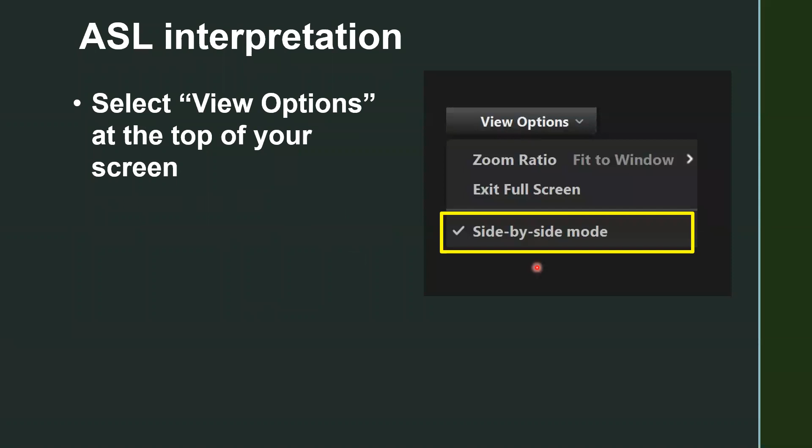I also want to talk about optimizing your screen for ASL interpretation. You can go to the top of your screen, click on View Options, and select Side-by-Side Mode. This is what that will look like on your screen. Once you click on Side-by-Side Mode, you should be able to see both Sarah and Lori, our ASL interpreters, on the right-hand side. This is just a sample image—this isn't actually Sarah and Lori.

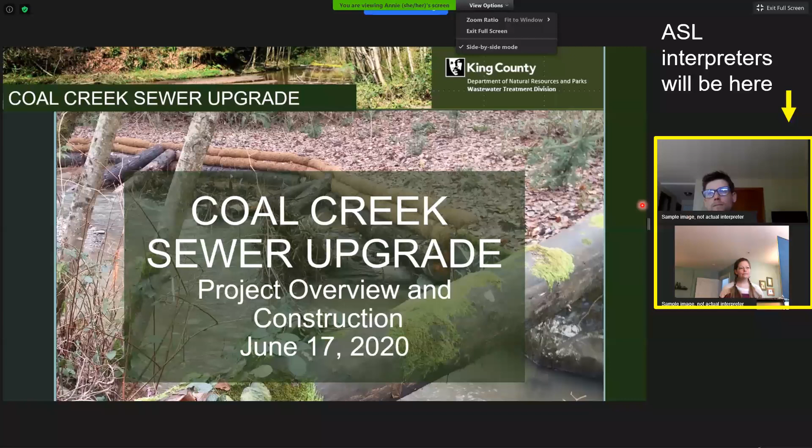If you would like to make the window bigger so you can see Sarah and Lori easier, you just click on this bar here and drag it to the left, and that will make the screen bigger so you can see the presentation and the ASL interpreters at the same time.

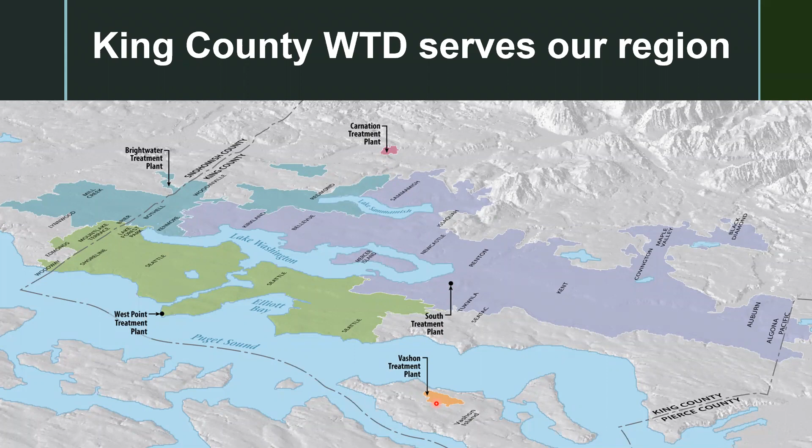We also operate two local treatment plants, at Carnation and on Vashon Island. Overall, we treat an average of 180 million gallons a day, but that number can go much higher when it rains. It can be hard to imagine big numbers like 180 million gallons - it's enough water to fill 3.6 million bathtubs every day, if you can imagine that many bathtubs.

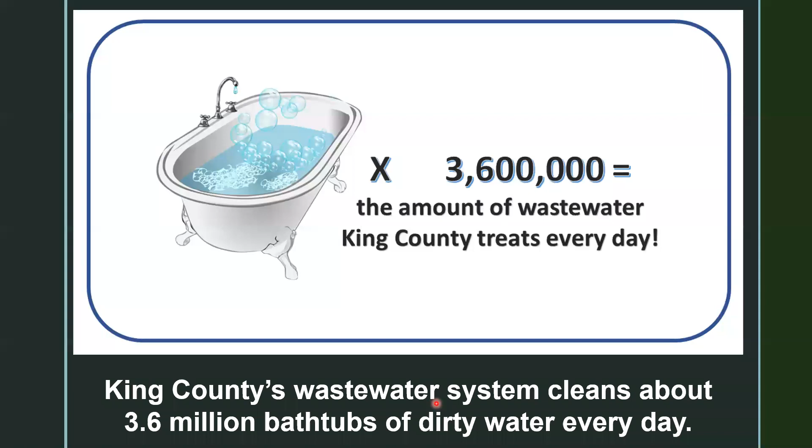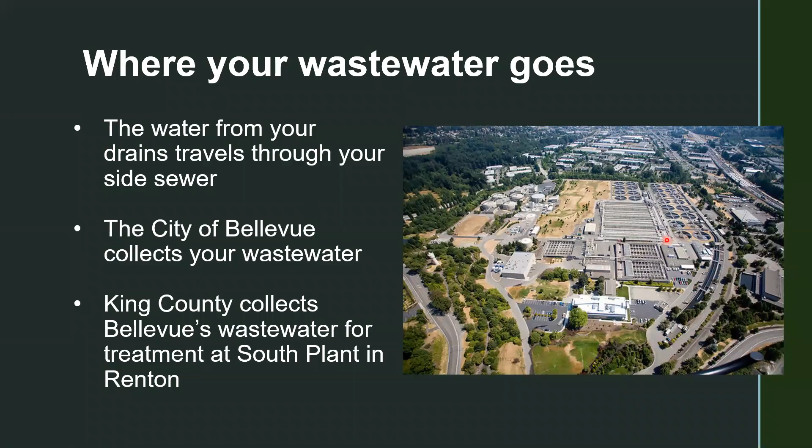Now that you know who King County WTD is, I'm going to show you why we need to build this project.

You may be wondering why there's a pipe along a creek in a park. This is in part due to the fact that this pipe was built a long time ago, before the park and trail system existed. For the designers at the time, this was a really sustainable approach, because the system was able to use gravity to collect wastewater down at the low point of the ravine, which saved on equipment, energy, and labor costs.

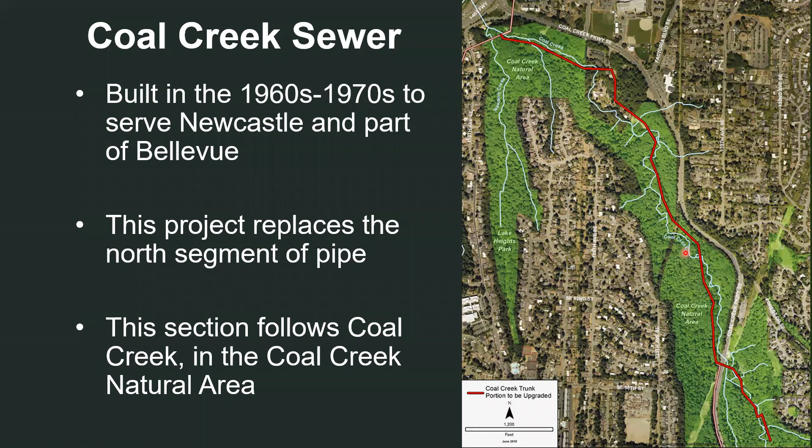So King County needs to do this project because the pipe doesn't have enough capacity to support this growth into the future. At the county, we monitor both pipe flows and population growth, and we start projects like these when we see that the pipe might not be large enough in the future to meet the needs of the community.

Right now, this part of the Coal Creek sewer doesn't have enough capacity to meet the King County pipe size standards, and there's currently a 50% probability that the pipe could overflow to the creek in any given year, which is something we really don't want to happen.

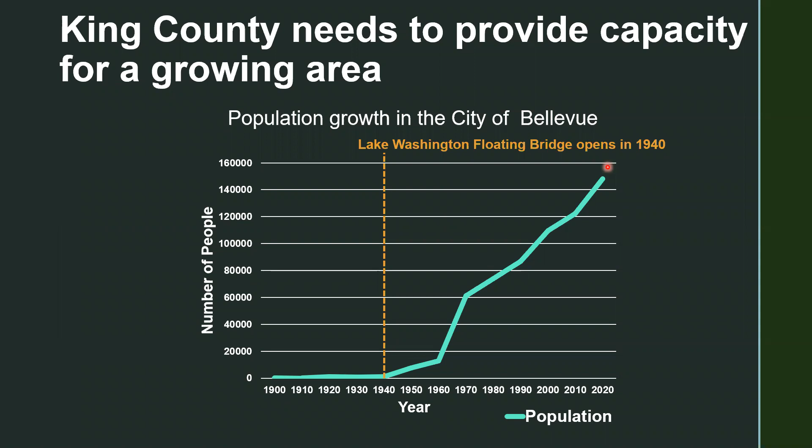If the sewers were in perfect condition, we would have the same flow in dry weather and in big storms. However, if the pipes are not maintained well, they can get cracked and groundwater can seep into them. This then fills the pipe in large storms with water that is not actually wastewater. Leaky sewers are not just taking up space in pipes, there's also additional costs to pump this clean water to a treatment plant and then treat it.

So if you are a homeowner, you can really help save capacity in our pipes and control costs by periodically inspecting and maintaining your side sewer so that we can keep groundwater out of the pipes.

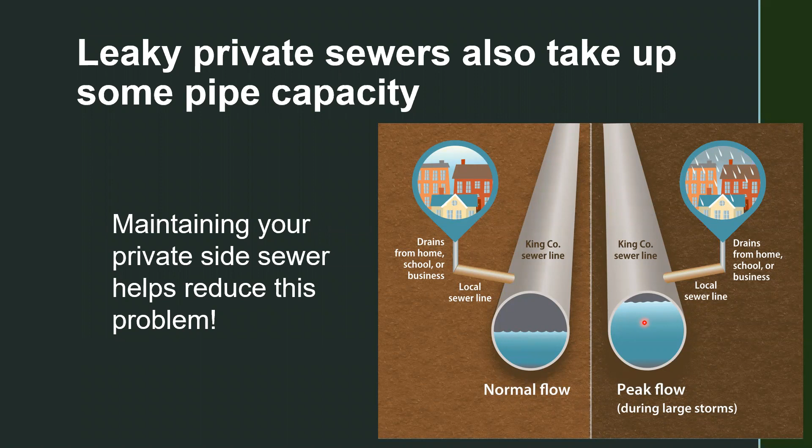Besides providing more capacity in the pipes, this project really gives us an opportunity to find a better location for the pipe and get it out of the natural area. Due to its unfortunate current location, we have had to carry out several projects to repair and stabilize the creek banks after large floods have exposed the pipe. So far, this has happened at least 4 times. In all those times, the pipe has stayed intact, but it is at risk every time the bank erodes.

Right here, you can see the pipe erosion and how steep the side bank gets. On the left, you can see where the pipe was eroded in 2015. Over in this picture, on the upper right, you can see the extensive damage that was caused after a major flood to this bridge and to the trail system. This white thing here is the pipe that has become exposed.

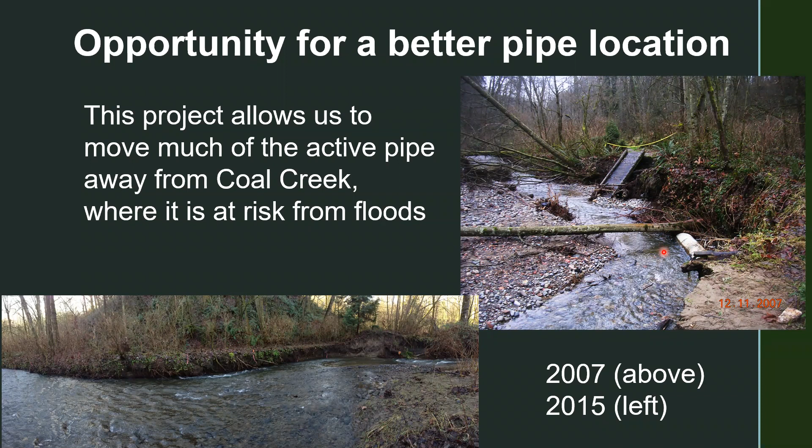Our team looked at this pipe upsizing as an opportunity to move the pipe away from the creek, protecting both the pipe and the creek. So this improved design will really help reduce long-term costs for our ratepayers.

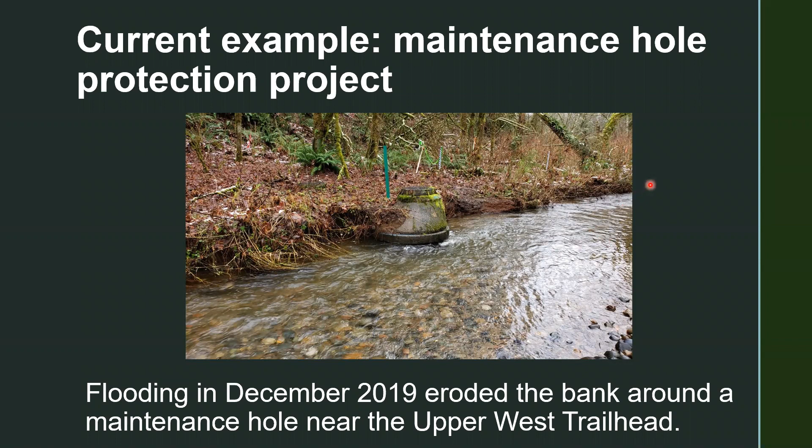We are currently dealing with an example of why we need a new pipe location right now. There was some large flooding back in December 2019 that eroded the creek bank by this maintenance hole structure. You can see how this structure is now exposed to the creek instead of being protected by the creek bank. And just for context, the pipe comes underneath the creek here and then flows up the side here. The large rains and floods in the December 2019 event also filled the sediment pond by the Upper West Trailhead, which is just downstream of here, and many of you may have used that parking lot.

So this is just another view of the maintenance hole structure from the other side of the creek, but this is during much lower flows. You can see the water is a lot shallower and narrower.

Our facilities inspection crews have been monitoring the structure since these December floods. In this picture, you can see one of our employees going to measure the ground cover above the pipe and around the maintenance hole structure. There's been enough erosion around this structure that we need to do a temporary project to protect the maintenance hole

until the larger project is finished. This summer, we will be completing a project to shore up the bank. This structure here and the pipe will eventually be removed when our new project is in place.

This smaller project is in environmental review right now, and you have a chance to comment on the work if you'd like. You can find links on our project website to find and review the environmental documents and provide comments.

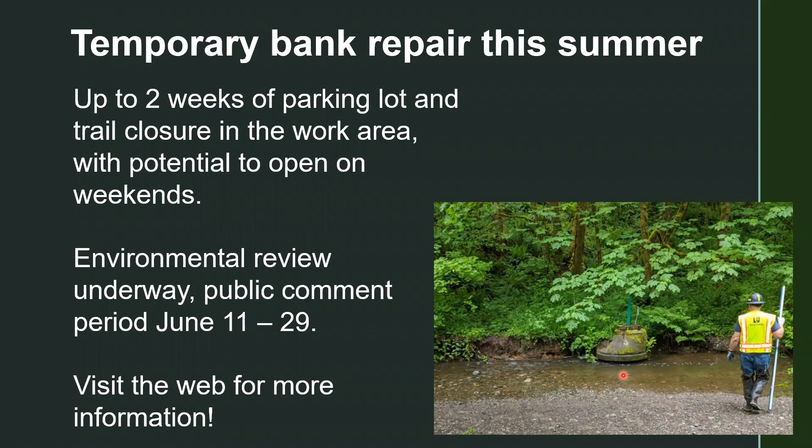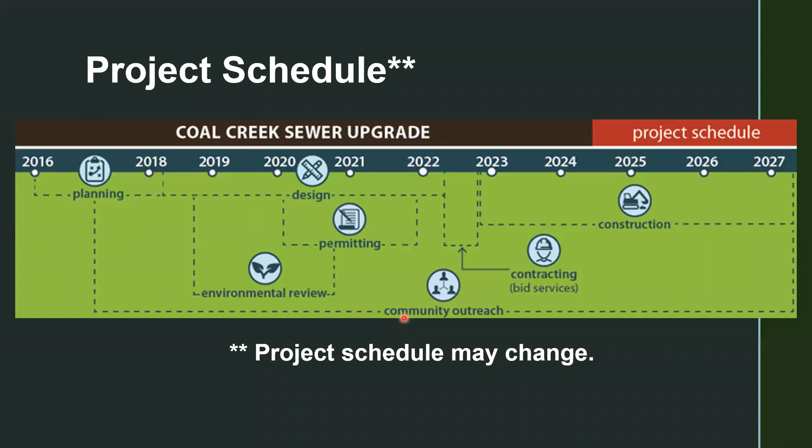Thanks, Liz. This is Ron Bard. I'm the project manager for the consultant team. I work with Brown and Caldwell, and I'm leading the design team to help design the project for King County.

The local system now connects to the existing pipe. We're moving the new pipe over quite a bit, so that requires a fair number of new connection pipes to go from one to the other.

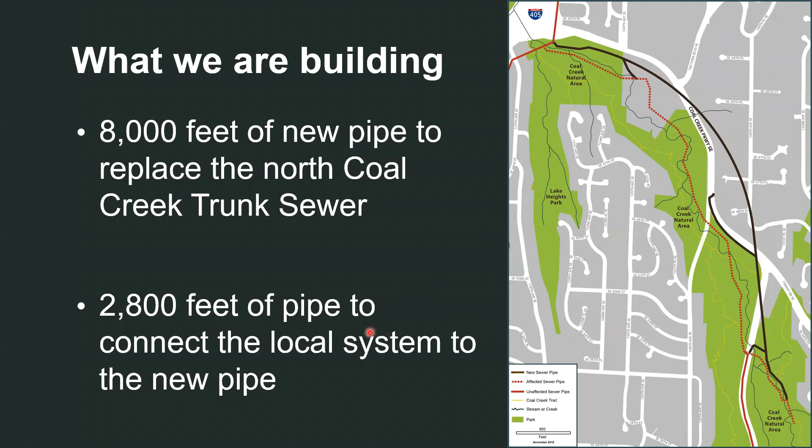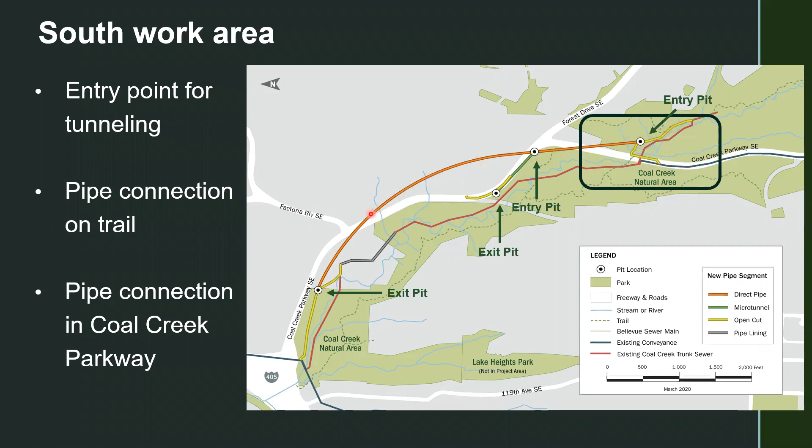This is where the entry pit is located, and where the tunneling will start, and where the tunnel boring machine will feed pipe into this new tunnel section that goes along here to the exit pit right here.

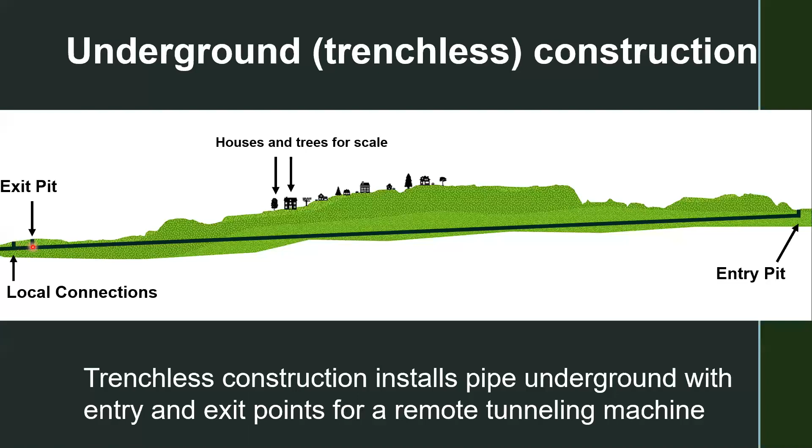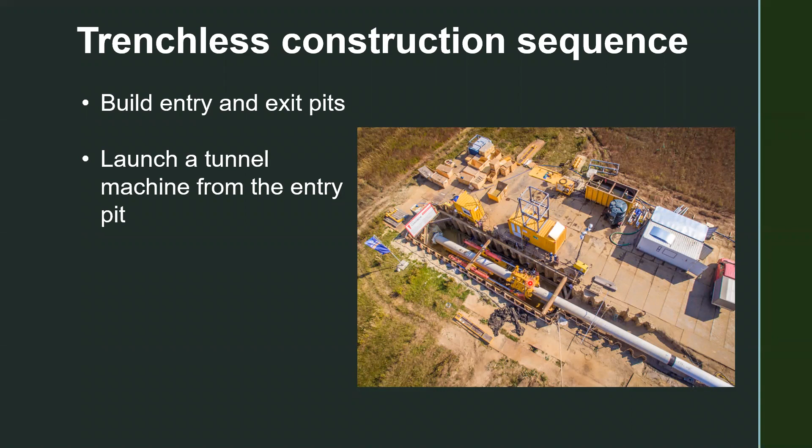The excavated material at the head of the tunnel boring machine removes the soil and carries it to the entry pit, where the soil and the drilling fluid are separated apart, and the drilling fluid is recycled. The excavated material is hauled off site.

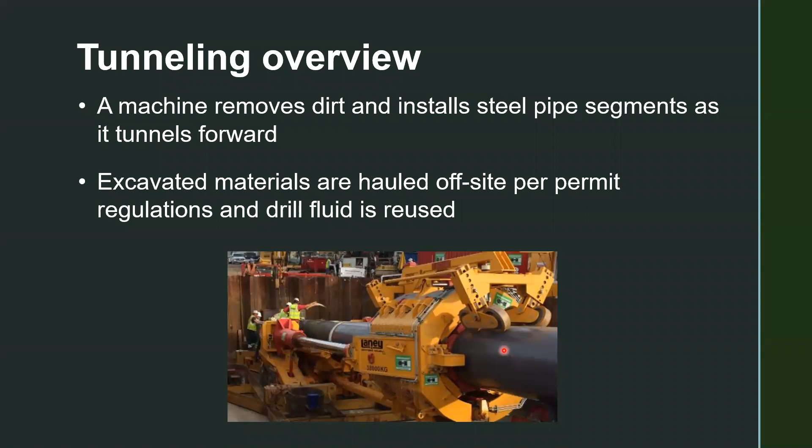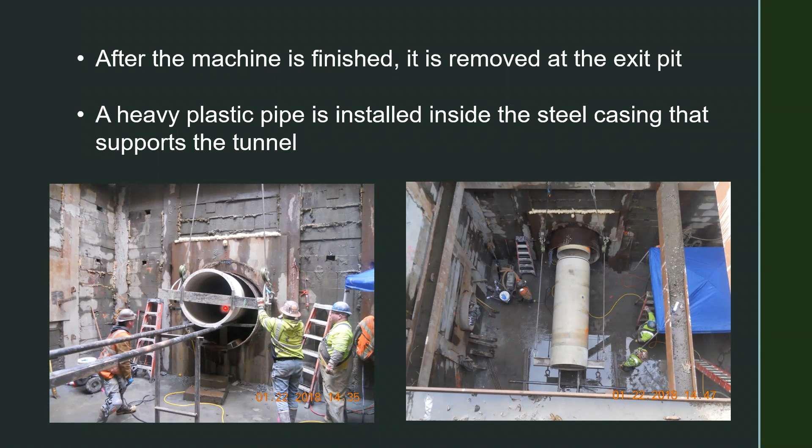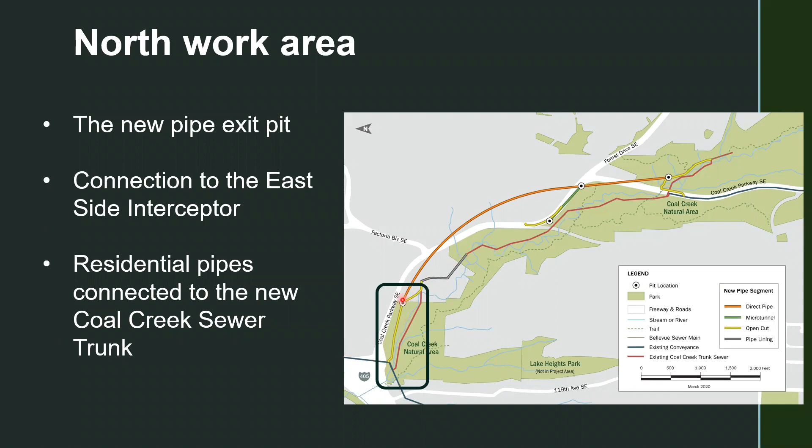I'll come back to the south area now, into the natural area, and talk about the connections that will be done there. There are several City of Bellevue pipelines that come down the hill to connect into the existing pipeline all throughout this area here. We'll be keeping those in place, but reconnecting them to the new pipeline.

This pipeline in yellow here is again an open cut pipeline. It'll be installed along the existing trail that's there beyond the parking lot. And there'll be some work in the creek bank along here to stabilize that. There'll also be a retaining wall just uphill of the new open cut trench pipe to support the hillside and allow construction access to go through this narrow area.

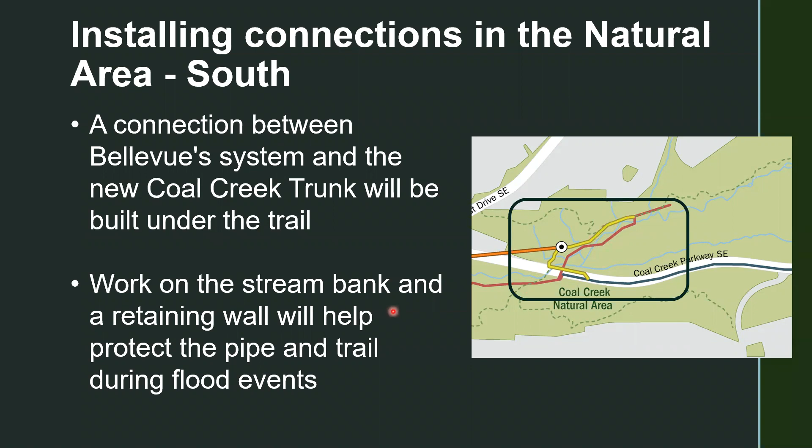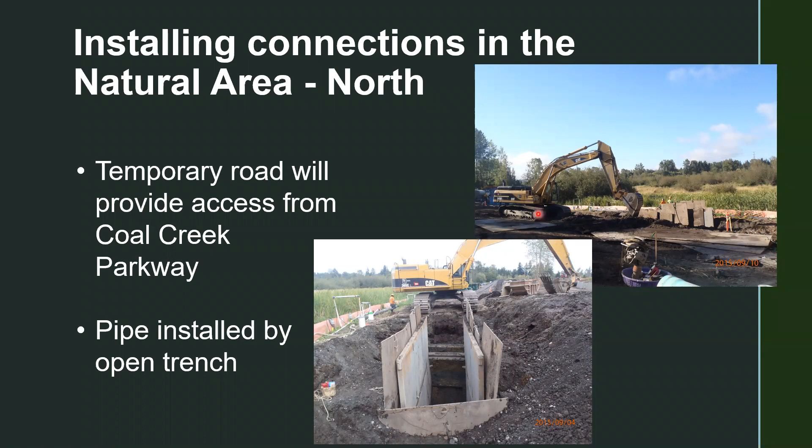So the construction duration, as Liz mentioned, the total duration for the project is 4 years, and that's a long time, but we have a lot of pipeline to put in. The most extensive work is in the Upper West Trailhead area, which is expected to be closed for about 3 years. Tunneling itself will take 2 years, and then some of the connection pipes that are up in that area take about another year.

Work that's done in the creek here and further south - there are 2 locations where you have work below the high water line in the creek, and there are regulated time frames for when that work can occur.

In this particular area, these streams work will occur during the summer, and that does affect the schedule, how the schedule fits together, and it extends it a little bit in this particular case. Also, the work hours we're allowed to use will affect the overall duration.

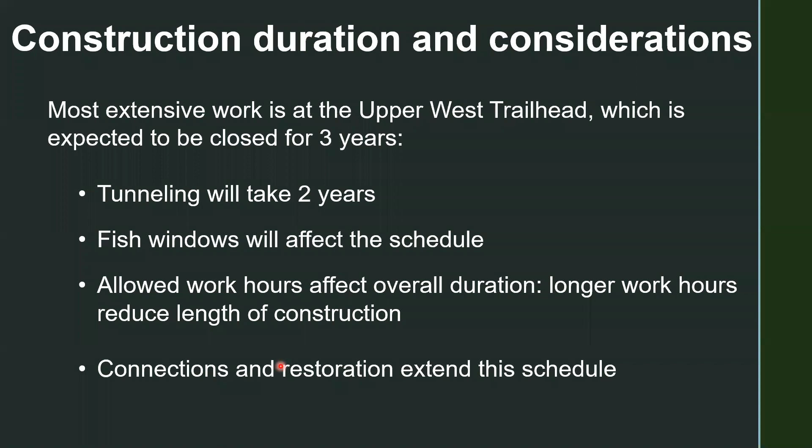Longer work hours mean the construction length is reduced. Also, the connections and the restoration extend the schedule, so all of that leads up to the 3-year activity we were talking about earlier.

Some of the other impacts in the Upper West Trailhead: not only will the trailhead and part of the trail be closed for 3 years, but...

Just south of the parking lot, there's a wide spot in the creek that was built and designed to capture sediment so it doesn't impact downstream portions of the creek.

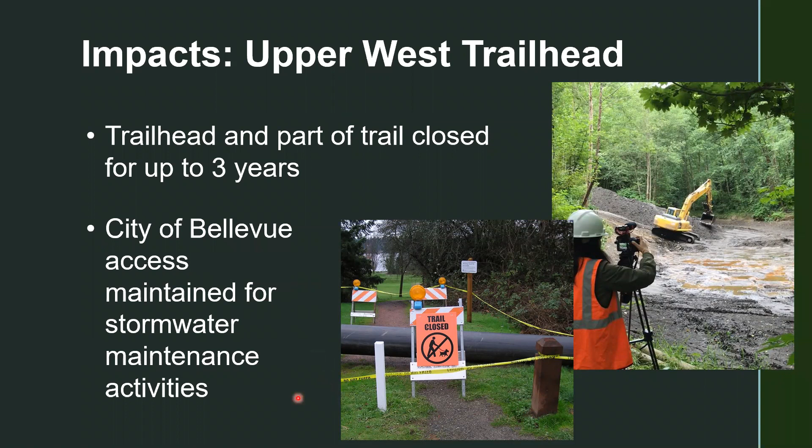Trail access during construction will be restricted. We'll be closing the parking lot and the trail, but we will be providing an alternate detour trail.

Although the main parking lot will be closed, we'll be working with the City of Bellevue to identify alternate parking at trailheads to reduce the impact.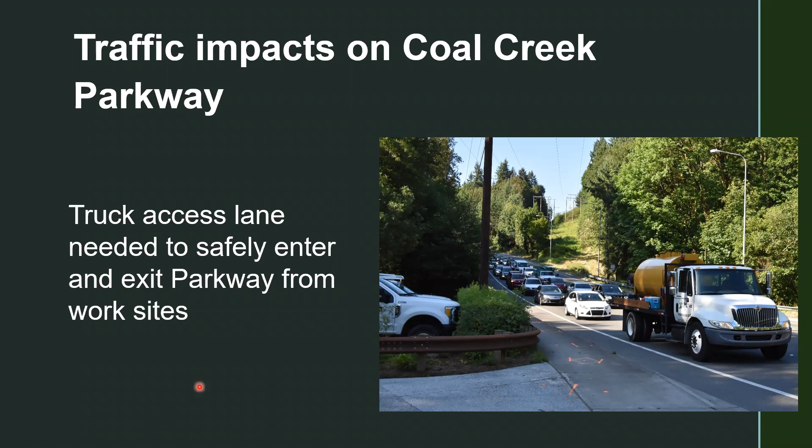There's also traffic impacts at the central section. As I said before, this area will actually have pipe installed in the roadway itself, so there'll be some lane closures when that occurs.

The microtunneling pits require some grading work that will impact traffic as well. The microtunneling itself is underground and won't impact traffic.

Just to reiterate what we talked about earlier, on the south end at the parking lot, this yellow pipe is where we'll be connecting the City of Bellevue laterals, but this other yellow pipe connects the existing south Coal Creek trunk, which is here.

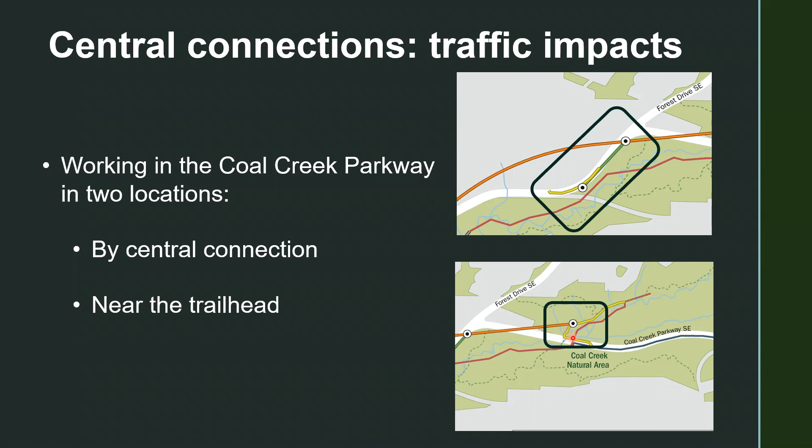That does not need to be upsized. We'll be connecting that and routing it over to our new pipeline. So some of this construction is in the street as well.

Traffic control options for reducing impacts to Coal Creek Parkway include working in phases, and trying to do work off hours or using extended hours to reduce the duration.

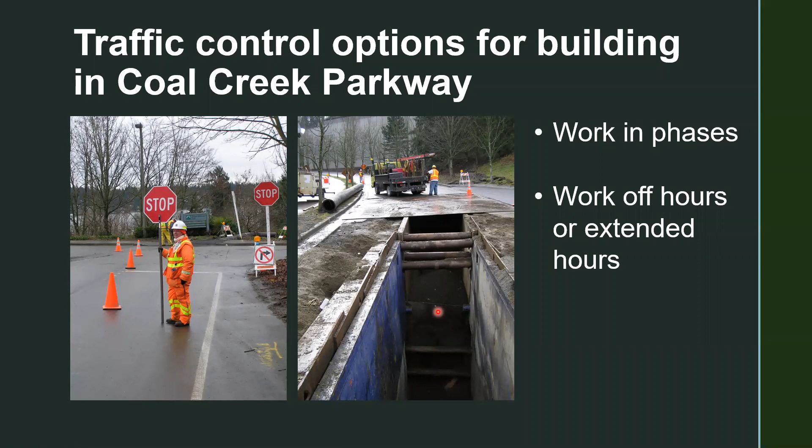The contractor will be developing a very detailed traffic control plan that he'll submit to the City of Bellevue based on our specifications and project requirements. We'll convey that information once construction starts, including what the impacts are and when they will occur, and if anything is unexpected, we'll do broadcast alerts to let you know.

It's very important to us to protect the environment, and there'll be a number of construction controls in place for water quality, air quality, traffic impacts, and noise and light impacts. We'll talk more about the impacts on the natural area at our June 23rd meeting, as Liz has mentioned.

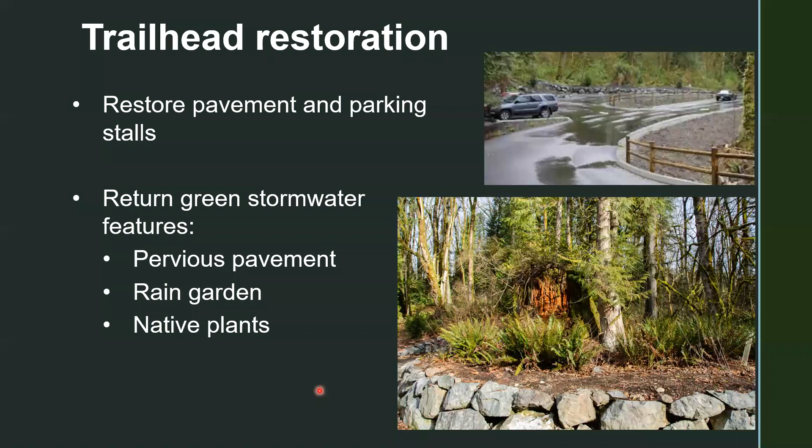So you've got pavement and parking stalls, and you've got a lot of really good green stormwater features here that are helping to protect Coal Creek, right? So we've got pervious pavement at the entrance, there's a rain garden, there's native plant protection buffers, so the runoff from that parking area gets filtered before it gets to the creek. So this will all come back.

But it always feels when there's new stuff there and you're going to take it out, like we've wasted something. And we don't do that. So at King County, our strategic climate action plan has pretty rigorous goals for what we are supposed to accomplish, including diverting construction waste from landfills. So our staff wants us to reduce our landfill waste, and they literally want us to divert 85% of usable materials or recyclable materials somewhere else.

So we looked at the trailhead and said, what can we do here? And one of the things that we're trying to do is work closely with the city of Bellevue so that if we're going to repurpose, we repurpose in the city. So technically, the rocks that you see on the left, the landscape rocks, the contractor could technically sell those. But we talked to the city about the potential to use them at alternate sites in the city, so they get repurposed in the city.

It isn't cost effective to store them and bring them back, but if we can find other city locations, we can actually use them there, okay? This sign on the right, this is the one you see when you turn into the Red Cedar or Upper West Trailhead. This sign will be stored by the city of Bellevue. They do have space for it, and it will come back.

There are a lot of actually really great native plants there. You have a lot of good wildlife in the area, great birds and bees. Those native plants are hosting a lot of wildlife. They can actually be used in people's yards. So we talked to the city of Bellevue about whether they would want the plants, and they said no, but if you can host community plant salvages so people can take them home, that would be great. So that's another plan that we have.

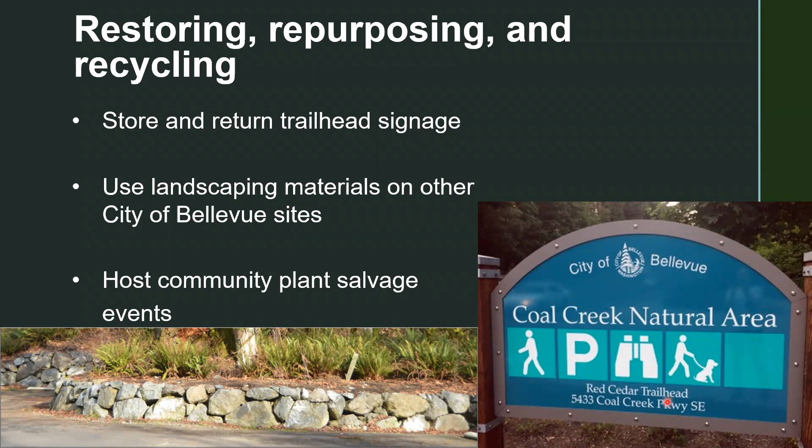We'll do this during the wet season when the plants will transplant better. But it's a way for us to reuse materials locally instead of just composting them and basically throwing them in the trash.

So when we do come back and restore, what you will find, Ron showed the spur trail where we will have to make a connection with the city of Bellevue system fairly far down the trail. What we're going to do is create access so we can get a vehicle down to inspect the pipe. Right now, our crews cannot get their equipment far enough to do decent pipe inspections, and that connection will still remain there. So we're removing much of the active pipe away from Coal Creek, but we need to maintain that connection to the city of Bellevue's system.

So when we rebuild the trail in this area, it'll be slightly wider and slightly flatter than it is right now, which will make it more accessible.

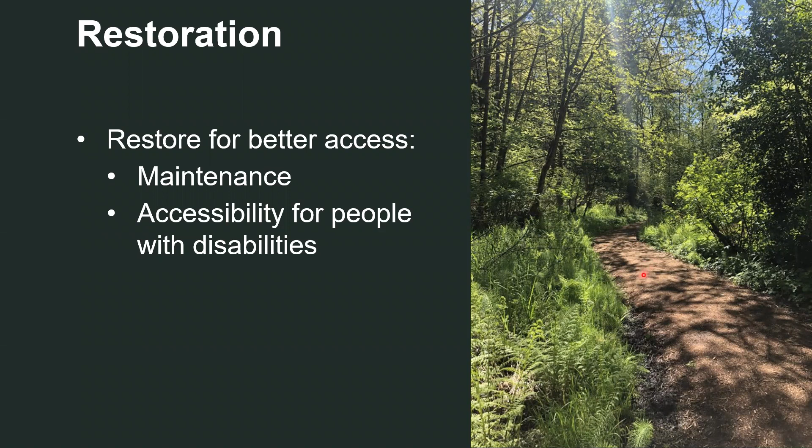We're also looking at increasing accessibility for people with disabilities. You don't have to pave to do this, because you can make a flat enough and appropriate enough surface that people with mobility issues can still navigate the trail and enjoy it.

The other thing we can add to enrich the area and create more accessibility for everybody is to work on signage and seating. We're working closely with Bellevue Parks Department on this, and we're looking at putting a bank of signage where we can talk about the great natural areas. The city has a signage program, and we're working to make this consistent with theirs.

As you go down the trail, the signage talks a lot about the human history of the area and how it's affected the environment. This gives us an opportunity at the trailhead to talk about the natural area. The city will also be adding educational signage about stormwater runoff and how it affects the creek.

The other thing we can do is add some seating. Currently there's no place to just go hang out at the trailhead and enjoy the creek and the birds. There was a big salmon release last fall in the creek, and it was great to watch. In the future, there'll be seating where you can sit and watch the salmon swim by, which was really fascinating. I have to say, I enjoyed the afternoon off work watching salmon swim upstream.

So we will be adding these features, and what we'll be doing is coming out and working with the community on what this looks like.

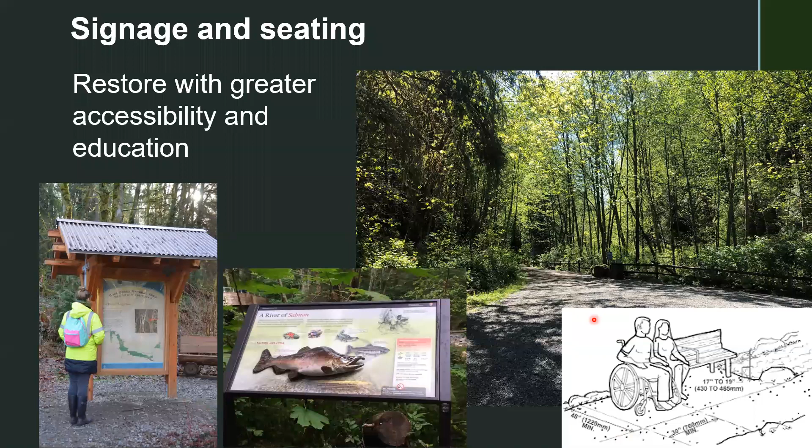So we talked about impacting forests and streams. I want to be frank about that - we will need to take trees down. We will be affecting vegetation and doing in-stream work.

This is important enough to the community that we're having an entire separate meeting on June 23rd to talk about that. Our environmental planner, Jacob Shepard, will walk you through how we're going to protect the creek during construction and the environment in general, and then what restoration is going to look like and the concepts of restoration. Jacob will be going through that on the 23rd.

Now I'm going to switch gears and talk about outreach. It's a really difficult time to be working with our communities, because King County usually puts a premium on in-person public outreach. We go to farmers markets, we host events, I've had literally living room and kitchen meetings with people - we're on your streets. We try to really meet one-on-one with people, have conversations, and spend time walking people through things.

We had great plans until the COVID situation hit, and right now we can't do that. However, we will have public comment periods on permits, and we will have environmental review coming up. We're really looking for meaningful ways to continue interacting with you, to get your questions answered, and to make sure you have the information you need to participate until we can actually meet in person, take you for a walk down the trail, and talk through the project like we normally would have.